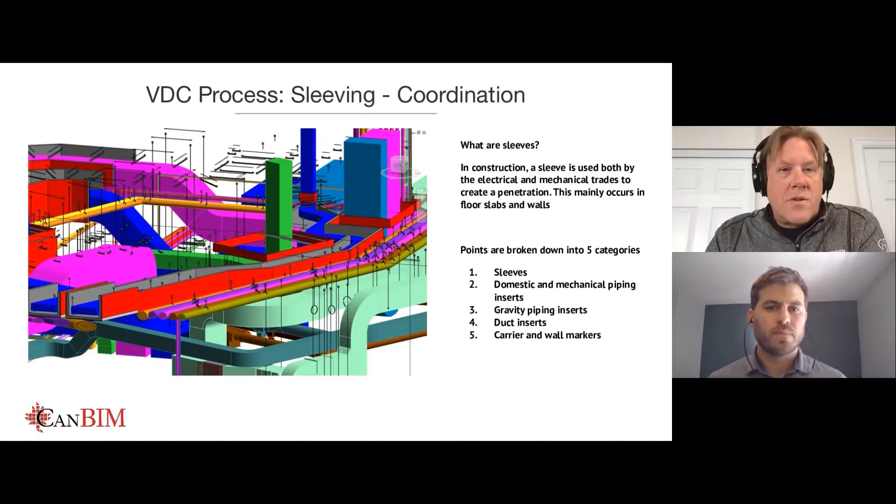So for those of you who don't know what sleeves are, it's basically a penetration through a wall or a slab or other part of the building, usually in concrete, where you can pre-plan where you're going to run pipe and conduit and ductwork. We generate these in our coordinated model to try to save time in the field and save money, because it's very expensive to core things later on. We basically do this along with several other point types in our model. We do it for sleeves, inserts, carriers and hangers and things like that. So you can see in the slide here, we try to coordinate all of our services together, including the hangers in the model, so that we know what we're going to get to in the field.

We take that data, and in the case of sleeving, we have several Dynamo scripts that we run to basically assist us in tagging this. It's very important for our guys in the field to understand where the sleeves are going, what they're for. And so this is just a sample of a project that we're working on out west, where we have fairly detailed information on every tag of what every sleeve is going to be for.

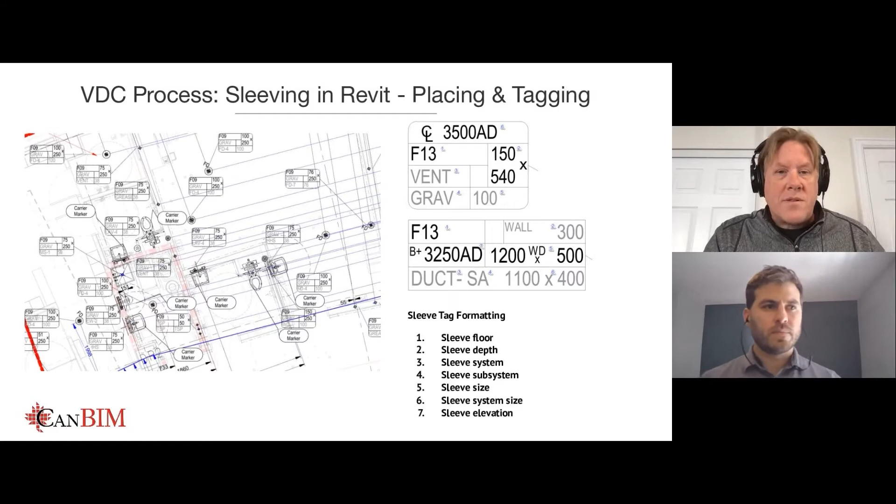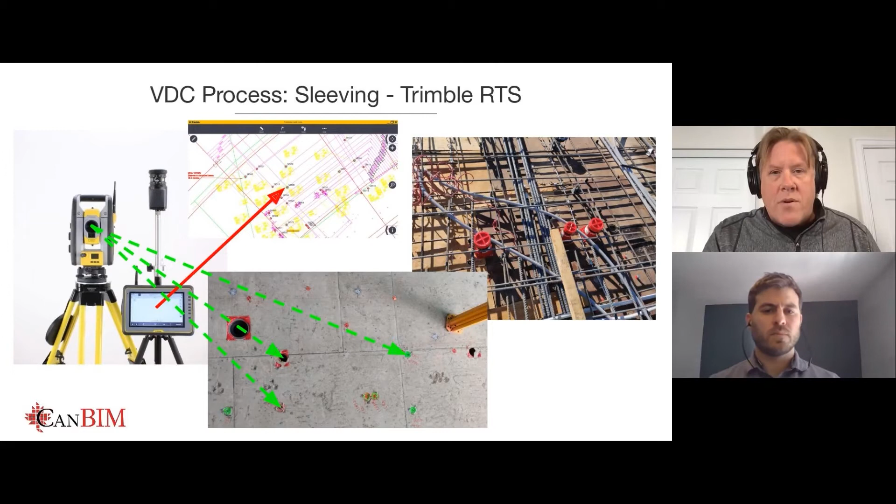We basically use the model data out in the field as well. So we export the point data out to a Trimble robotic total station, and the guys in the field are then able to use it to lay out the sleeves on the site. And you can see an example in the upper right there where there's some sleeves placed before the concrete gets poured.

The reason we try to do this early on is we can avoid coring. Coring is very expensive. It takes a lot of time. It's not very easy to do. As you can see on the right, there's a lot of conduit and in-floor services that are going to be in this slab along with the rebar. So after the fact, to put a hole in there would be very expensive. A typical small core cost is 1.5K.

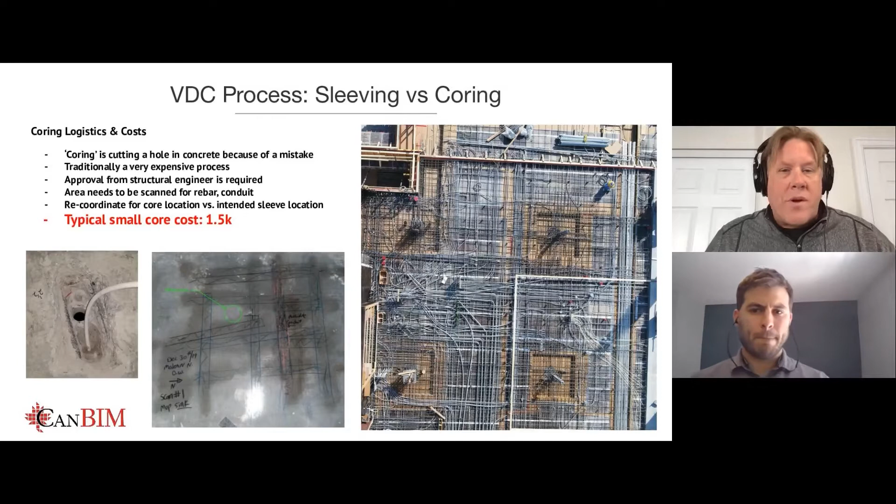And when you have a really bad day, coring can cost upwards of 25K. In this example, we just had two 100 millimeter cores, very small cores, but it took a lot of effort to get those in. So we had to jackhammer concrete out. We had to revise the rebar. We had to put in the cores themselves, and then we had to refill it back with concrete. And so it can add a lot of cost.

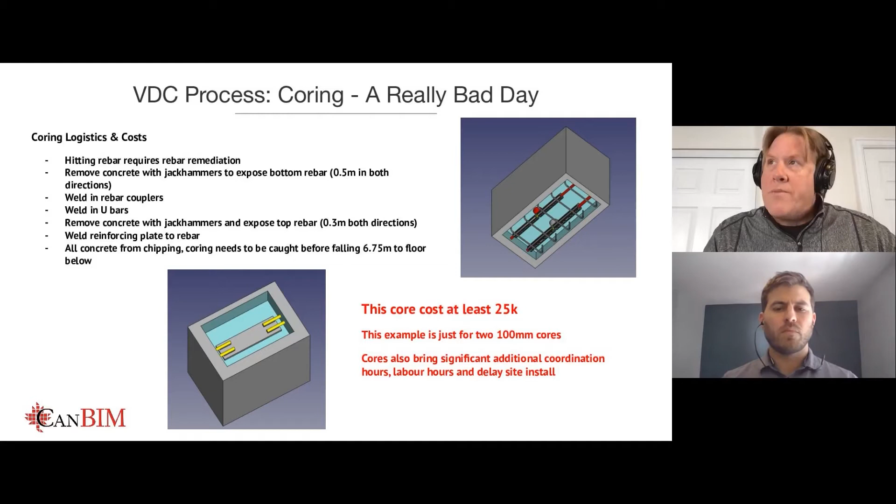So if you don't get the sleeving in early on in the project, you're gonna pay for it a lot later. So in a current case study, this project out west, currently we have 10,000 plus sleeves going in and 200,000 plus pre-inserts. To date, we've done 11,000 sleeves successfully, and we've only had to do 87 cores. So it's actually a very, very good effort on that project.

Our previous project was a 90% accuracy on our sleeves, and this one's 99% plus. So we're saving a lot of time and money on the project by being ahead and getting those sleeves in the right place from the model. And then you can see an example here. This is a linear accelerator vault for a hospital. The concrete's radiation shielding, so it has to actually be approved by the Nuclear Safety Commission. So you don't want to spend any time getting that one wrong. It's going to cost you a lot down the road.

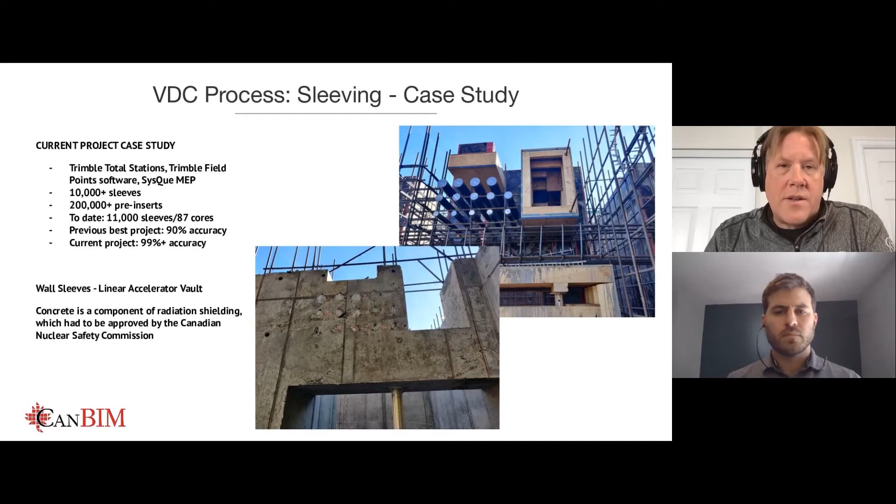One of the other things that we're doing a lot of, or we're trying to do more of, is getting into prefabrication. In this particular case, it's some ductwork for a hotel project. So there was a lot of repetition. We had, I think, 42 risers of ductwork that were all the same. So it just made sense to just build those all offsite and ship them in floor-by-floor sections that could be easily installed on the site.

In this particular case, we coordinate our model very closely with the general contractor and the subs. Once we have that coordinated, we model it in Revit. In this case, we're using SysQue, which is a Trimble product to allow us to make fabricated parts. And then we collaborate with our foreman to figure out where we should break all of our duct into prefab parts. And then we spool it in the software, basically make these sections, and then we manufacture it and assemble it in our shop. We ship it to our site and install it.

It's something that a lot of our foremen are seeing advantages on in the field. It took a while for some of them to come around, but they definitely see the benefits. There's advantages when it comes to scale. So if you're doing 42 of something, it's easier to just kind of manufacture it in a production line like you would a car. The other is quality control. You have better results on your connections in the shop than you would on a scissor lift out in the field. And then health and safety obviously is another one.

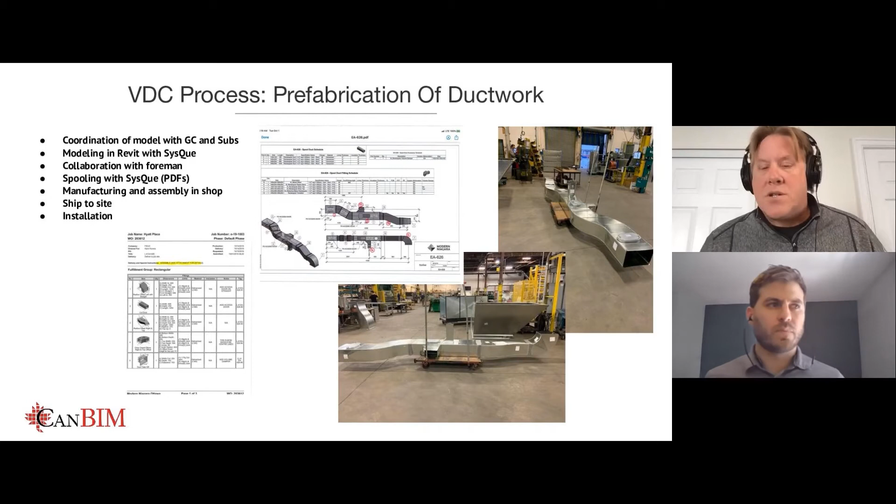We can pre-build these, especially in the age of COVID, and pre-build most of it in the shop in controlled conditions and then ship it onto the site where we have minimal people having to be involved in installing it. It also keeps the site clear, so you don't have as much material waiting around to be installed.

And then the third thing that I'm talking about today is our model to fabrication workflow. In this particular case, it's kind of an interesting piece, but this can be applied to any of our large piping projects. This was a flume for the University of Ottawa. Basically, they're running water through this piping, and then it gets pushed out of this hole array and they're using it to study erosion at the University of Ottawa.

In this case, it's a 24-inch pipe. It has two 16-inch feeder pipes that connect to the top with saddle cuts, and then there's 182 2-inch holes that are punctured into this 24-inch pipe. In the past, we did one of these before, and I think it took a week and about 20 different hole saw blades to get through.

And in this case, we were able to model it in the software with fabrication parts. We spooled it in our manufacturing platform, Stratus, and then we were able to directly send a file from the model to our pipe cutter in Toronto, and it cut it on the pipe cutter in about 20 minutes.

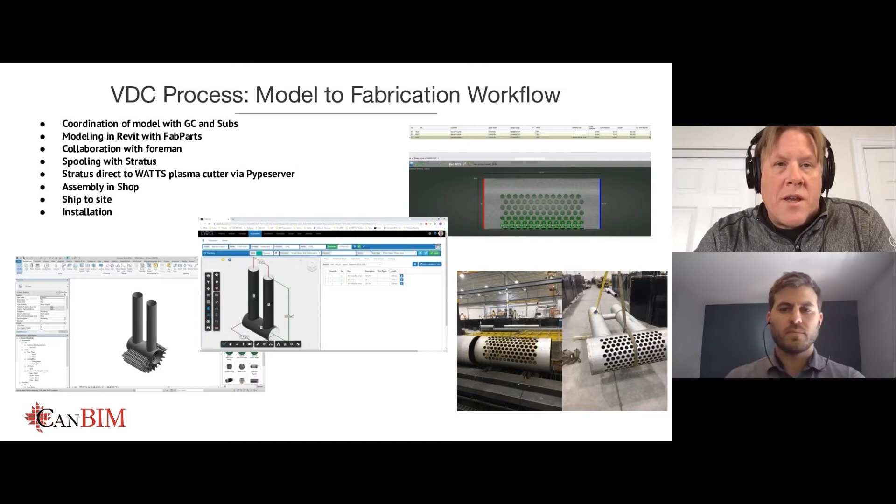We assembled it in the shop and shipped it to site. So again, more prefab. With that, I'll turn it over to Patrick to talk about the other collaboration that we're doing between GC and subtrades.

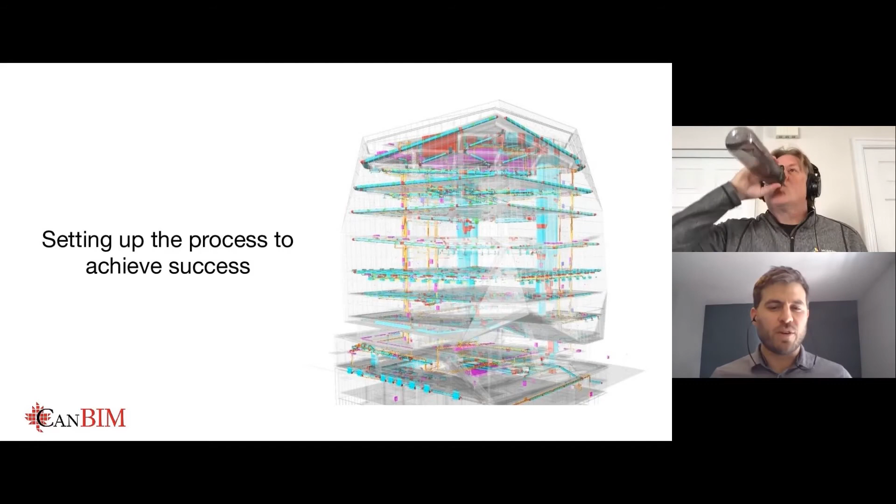Thank you, Phil. Yeah, so I'm going to pick things up here and talk about things more from the general contractor's perspective, and how we set up the process on our construction sites to manage the different multidiscipline trades and the different 3D models available to bring them all together and to facilitate that coordination right through to project delivery.

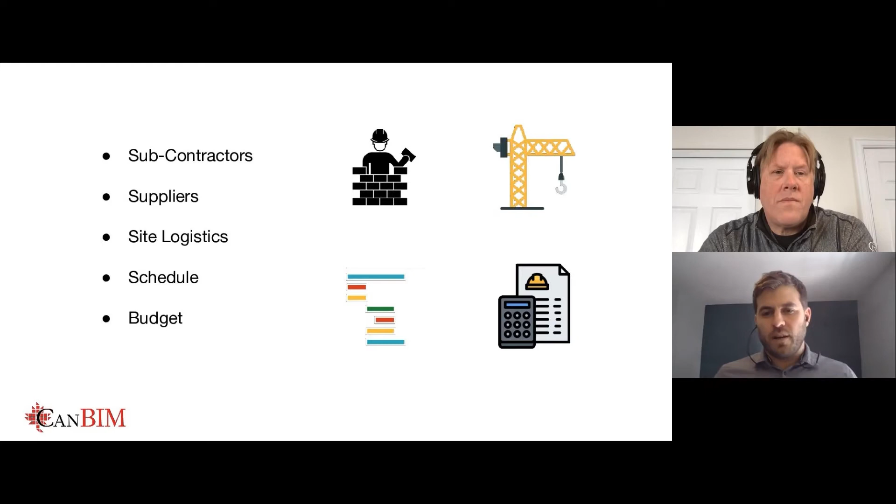So from the general contractor's perspective, we're mostly interested in a few major things. We are responsible for managing multidiscipline subcontractors. We're responsible for the management of various suppliers, site logistics, the overall project schedule, and ultimately the overall project budget.

So when it comes to BIM and when it comes to establishing these processes, we want to break it down into a few core principles. Technology is absolutely a big factor in it, but also getting the right processes put in place, and having the people that are trained and educated and willing to participate in these processes. So you need to have these three main categories to make sure that the overall process is going to work efficiently.

So I'd like to map out the overall process and a bit of a timeline. There's a few major critical milestone activities that need to happen throughout the timeline of a construction project. So first off is collecting the issued for construction or the design intent Revit files or 3D models. Usually those come from the designers or the engineers that illustrate the design intent. From there, you want to make sure you include the BIM requirements in the subcontractor's scope of work to make sure that they are going to participate in providing all of their 3D content to the overall process.

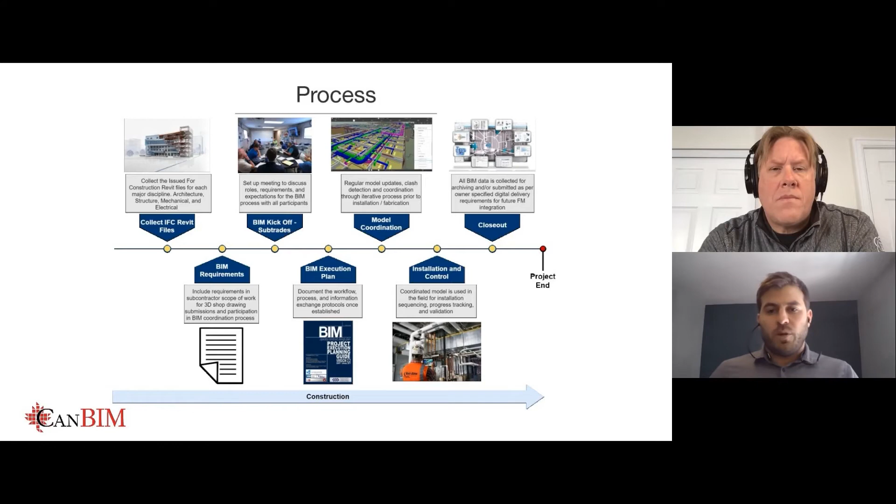So I'll talk a little bit more in detail about all those key steps. So collecting the 3D data: the design intent is typically done in 3D design software. Just like we would receive a drawing roll of paper when they get issued for construction, we're also receiving the 3D models. So we need to make sure we collect all the available 3D content that has been developed during the design process.

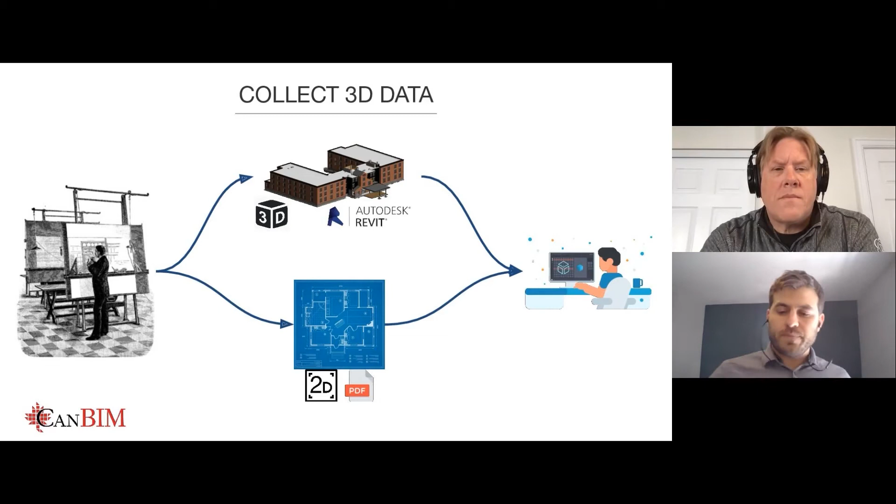And then the BIM requirements in our subcontracts: typically, you put those requirements in the major trade contractors, being HVAC, plumbing, electrical, fire protection, and structural steel. Those requirements basically outline what the submittals look like, requirements to participate in the BIM Execution Plan, what the 3D fabrication model submissions should look like, what the 3D submission process looks like, and then any sort of ownership or proprietary information that needs to be protected.

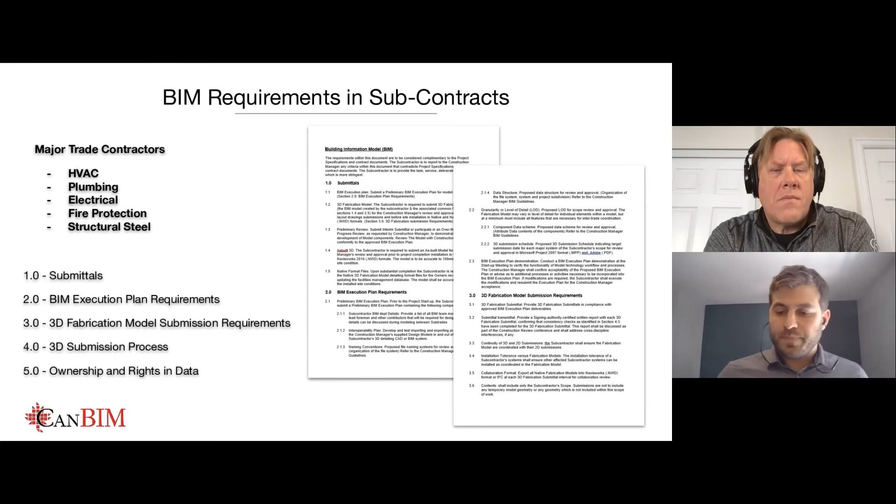And then the execution plan. The execution plan is a document that typically outlines three major principles: the uses and goals of the model, the process, and any sort of supporting infrastructure. So the uses and goals are essentially just the intent of why is the model being developed? What are we trying to achieve with doing this process? It sort of outlines the overall objectives.

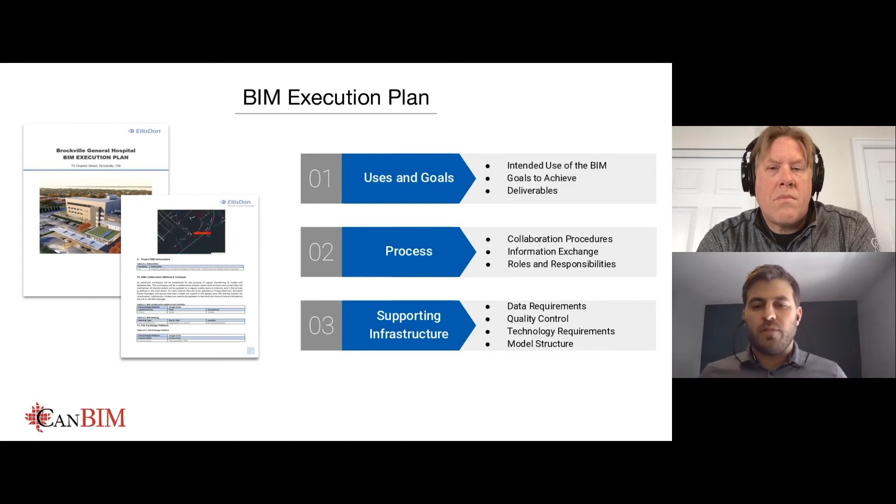Next is the process, where you get into the details of what collaboration procedures are going to be used, how you're going to exchange information, and what the roles and responsibilities of the participants are. And third is the supporting infrastructure: technology requirements, any sort of quality control measures, model structure, zoning, and that sort of thing. So those are the key components. With a BIM execution plan, typically there's no right or wrong way to create one. It just needs to capture these core pieces of information.

And in the execution plan, one of the critical things is getting everybody on the same page with level of detail. And level of detail is essentially defining expectations. When someone says you want to see a model or a BIM model, that's a very open-ended statement. So the level of detail helps define what that BIM model looks like and the information that resides within it. So typically, design goes through levels 100 and 200 that illustrate the schematics and overall concept.

And then when we get into construction, we're typically dealing with levels of detail between 300, which is design intent, 350, which is a little bit more detail on exact routing, and then fabrication at LOD 400, which is what Phil has talked about with the direct to CNC type process, where we're actually dealing with parts and pieces that have been prefabricated. And then LOD 500 is on the operation and maintenance side, where you start to plug in more of the intelligent data, maintenance records and things like that to the model objects.

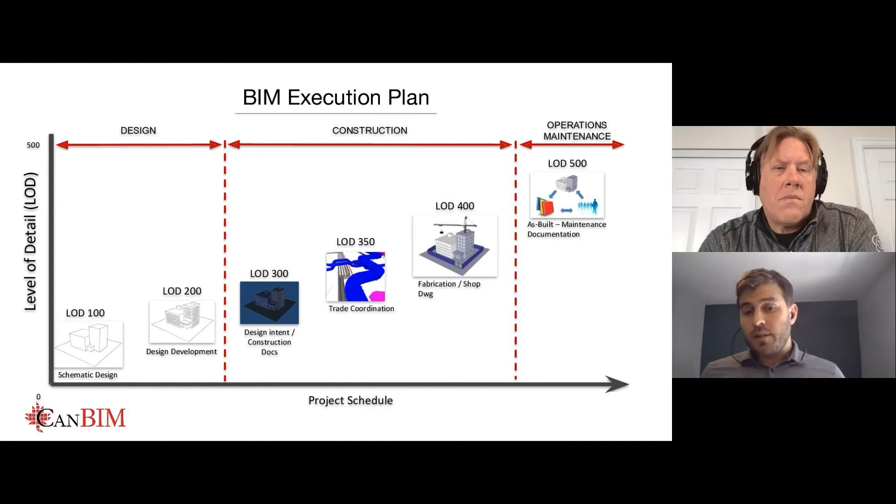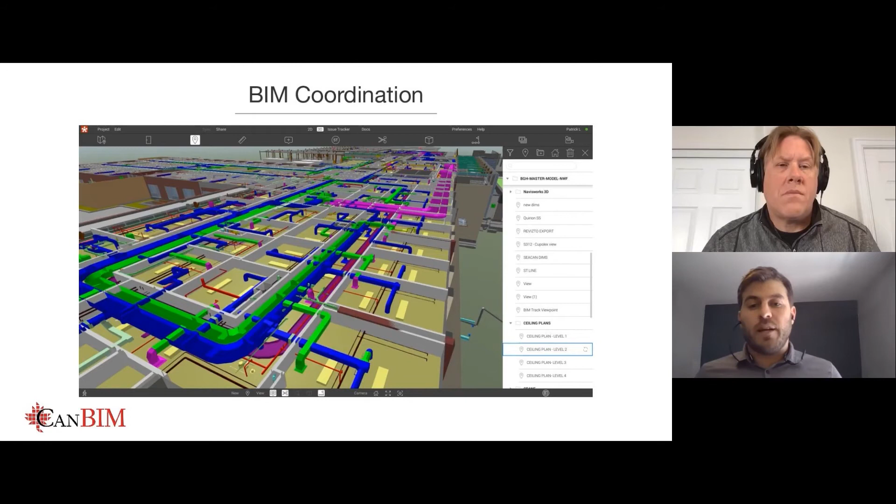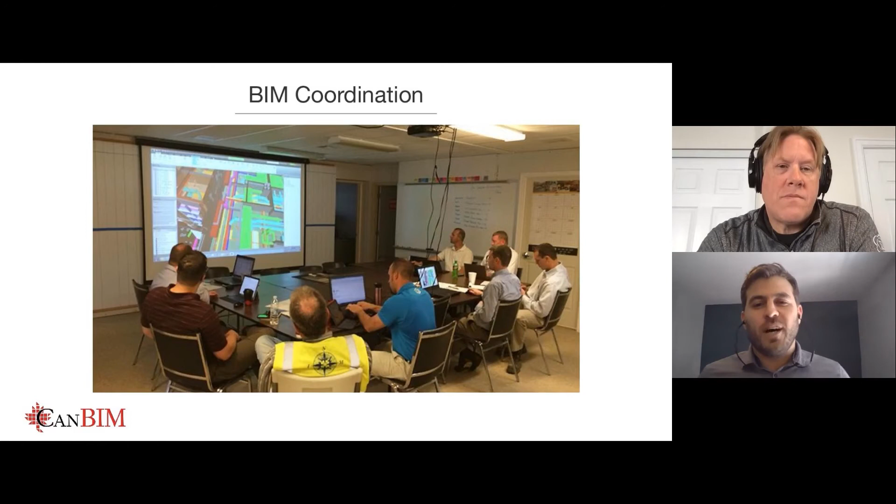So in the BIM coordination phase, typically what we're doing is collecting all of these models from the various sources and putting them together to review and to highlight any constructability or clash interferences. And when we bring all these models together, we're also bringing the people together to review and identify any of the issues that we're finding, and then help resolve them as well. Yeah, most of this is being done remotely now. Exactly. That's one of the benefits of having everything in the model in this virtual world: without being in the physical room, everyone could be in their respective offices, all collaborating on the same model together.

So a little bit of what that process looks like. I'm breaking it down into 7 major steps, where step 1 is model submissions, where models are submitted from each of the participating parties from their respective model authoring softwares. Those are all merged together in a platform such as Navisworks, and then published and distributed via, in this case, a software called Revizto. So that would be step number 1. Step number 2 is model review and clash detection. So using those tools to actually look through the model and find any issues.

Once issues are found, then you want to manage those issues. You want to identify who's responsible, tag them with any sort of priorities or information to help you sort and filter those issues. From there, you can have your coordination meeting. You can bring everyone together, run through your list of issues to resolve, and come up with an action plan on how to fix them. Which brings you to step number 4, where everyone goes back to their respective model authoring softwares and they do model corrections. They fix the issues that have been discussed in the meeting.

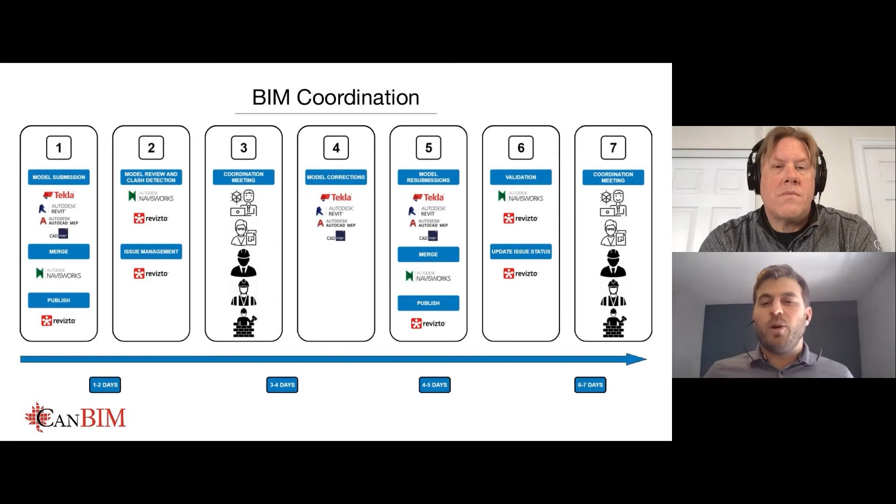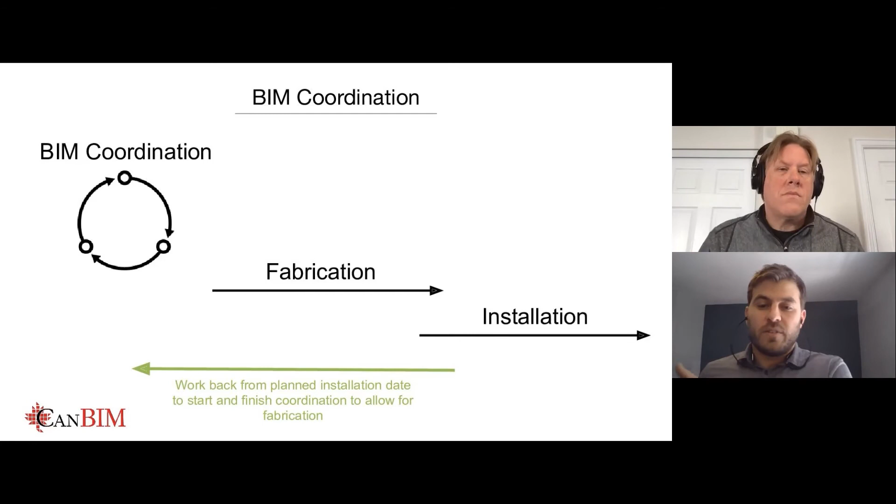Which brings me to the scheduling aspect of things. So you have a BIM coordination process that is cyclical, and you're going through this week by week. And you want to make sure that you have completed coordination so you can get into fabrication and installation. Fabrication typically has a lead time, and installation usually has a defined date in the project schedule. So you need to work backwards from that defined installation date to make sure that you've completed the BIM coordination for that area with enough time to facilitate fabrication and have the pieces delivered to site to be installed at the defined time.

So just a bit of an overview of what that all looks like. On the left we have design intent models that are typically not brought up to a higher level of detail for architectural and structural concrete. And then for fabrication level of detail models, we have structural steel, HVAC, plumbing, electrical, and fire protection. And these are all coming from their respective sources.

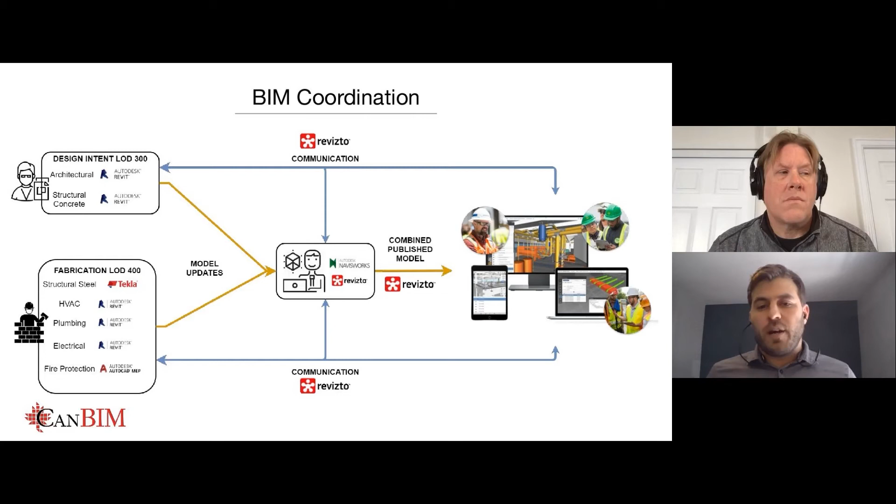And these model updates are getting funneled to the lead BIM coordinator on site. That's going to be combined and then pushed to the field. And also anything that's inside the model is communicated back to all the different parties through Revizto. So, installation and control.

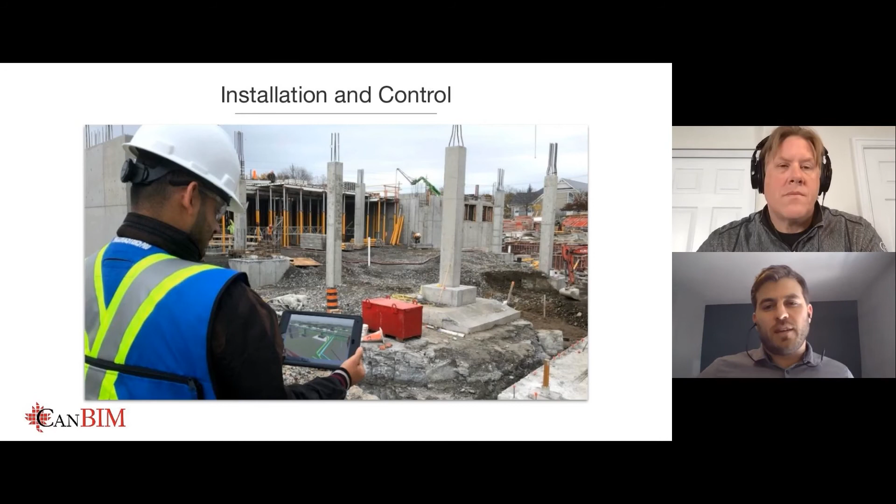So once we've completed our BIM coordination process, we have a fully complete coordinated model. Now we have this product that we can use in the field to help our execution teams and our installation teams build what we've coordinated in the model. So this is a huge part of the process, because we want to make sure that all the work that we did at the front end gets carried through to the rest of the construction project, so that the execution is as efficient and coordinated as possible.

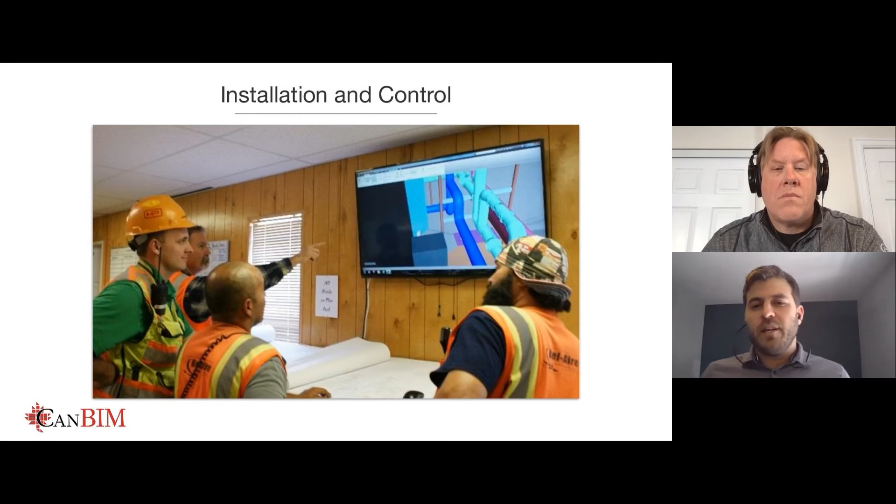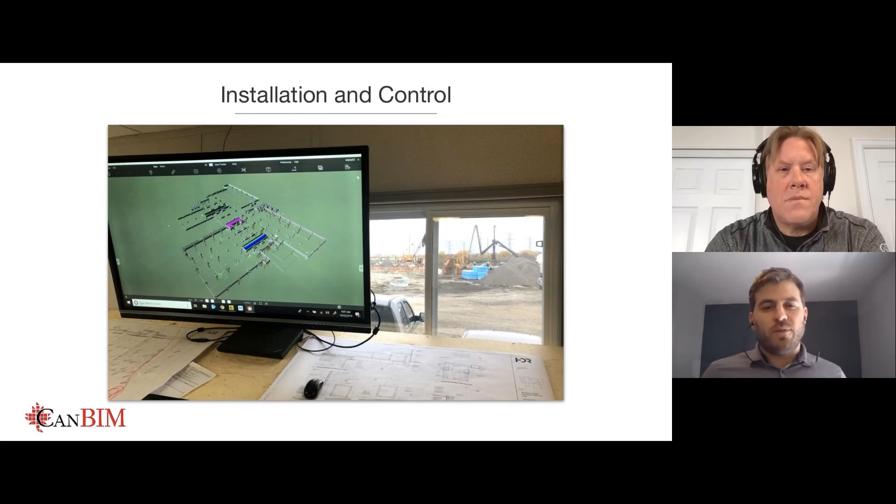So these are just some examples of how we're leveraging those models on site, and how we're carrying through that previous effort of coordinating right through to installation and construction. So here's some more examples of how the model is a critical tool on our construction sites to make sure that everybody's on the same page.

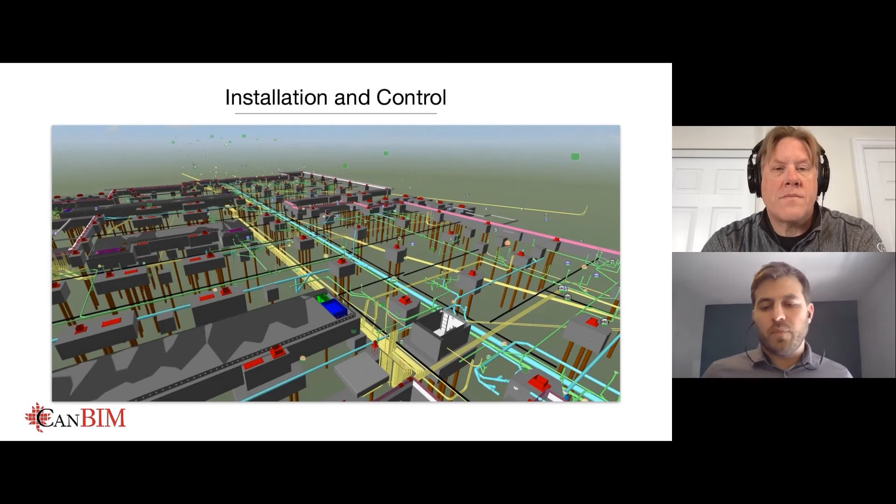And here's an example of some underground utility work where we've coordinated all of our underground electrical conduits, plumbing, structural concrete. So now we're able to execute that work very rapidly in the field.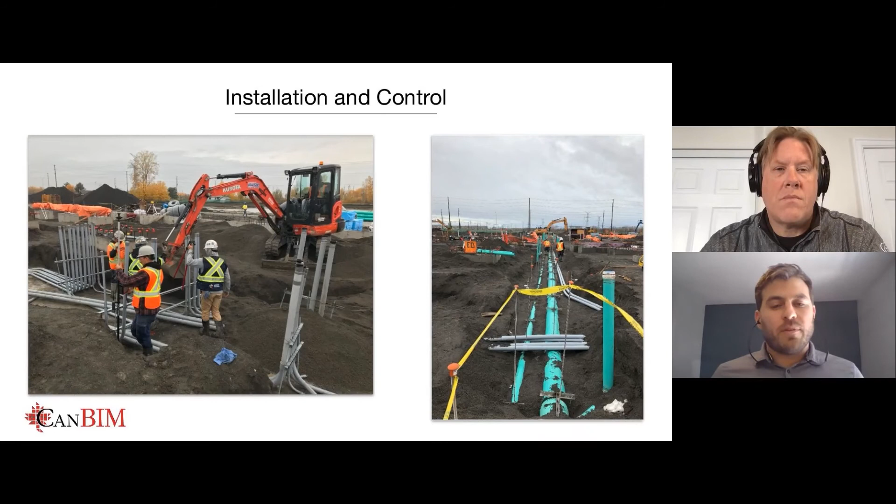So similar to what Phil was showing, this is an EllisDon, Modern Niagara project here, where the installation team have their GPS sticks out there, and they know exactly where every pipe goes and where every bend goes. They're not out there making decisions on what to do next, or to bend left or to bend right. They're just purely focused on executing the work and installing things exactly where they need to install them. So this allows us to maximize our time on site and make that installation process as efficient as possible.

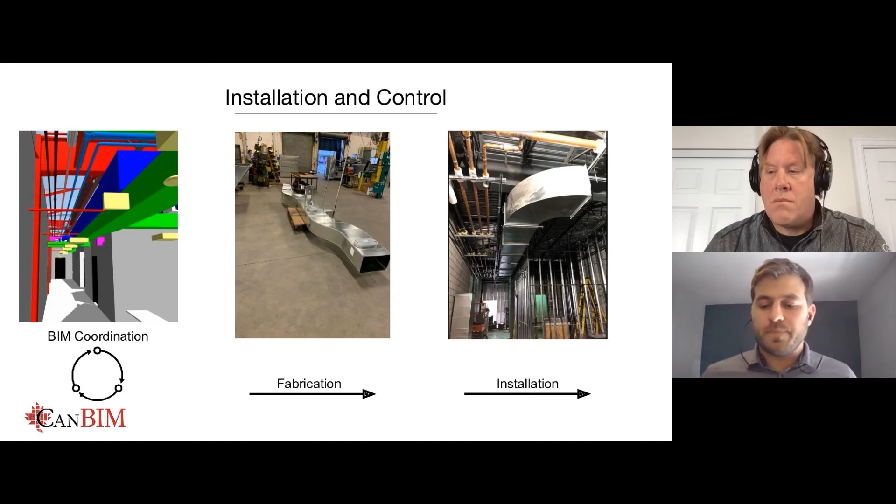So to reference back to that schedule again, we have our BIM coordination process that takes place virtually in the model, which gives us time to fabricate directly from that model, and then the installation process can take place exactly the way that we've developed it in the model. So here's just some other examples of what that looks like, keeping that continuity from the model coordination and carrying it all the way through to construction.

And I think to tie that into the topic of today's event on digital twins, essentially the model is a digital twin of what we're building, right? So coordinating and maintaining that twin all throughout the project is a critical aspect of it. And images like this really show how keeping that continuity between model and reality is essential to the entire process.